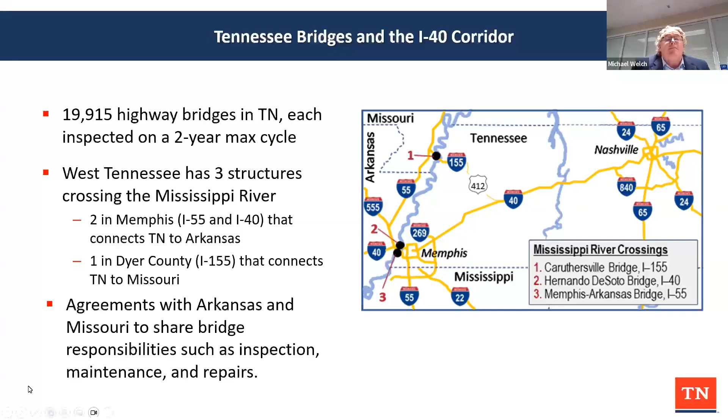The fracture itself was discovered back in May of '21. You can see it gives some scale, since there's people down walking around it making assessments, but you can see the scale of what we're talking about. It was a box beam that fractured, and I think only one side was completely intact. Major concern was the inspector was out actually inspecting the truss section of the bridge, and just happened to see the fracture, and called 911 and then called me directly. His name is Fred, and I told him the other day, anytime my phone rings and the name Fred pops up, I'm answering it. I don't care what's going on, because you definitely got my attention that day, Fred.

So we did put in measures to close the bridge immediately to traffic, and communication with locals, with Arkansas. It was a governor-to-governor, commissioner-to-commissioner kind of conversation, and then lots of planning. Lots of playbooks were pulled off the shelf to see, step by step, what would help us, and then just trying to be as transparent as we could. The one thing we wanted to do was evaluate what kind of condition the bridge was in from a global stability standpoint, and then try to get some things in place to make repairs.

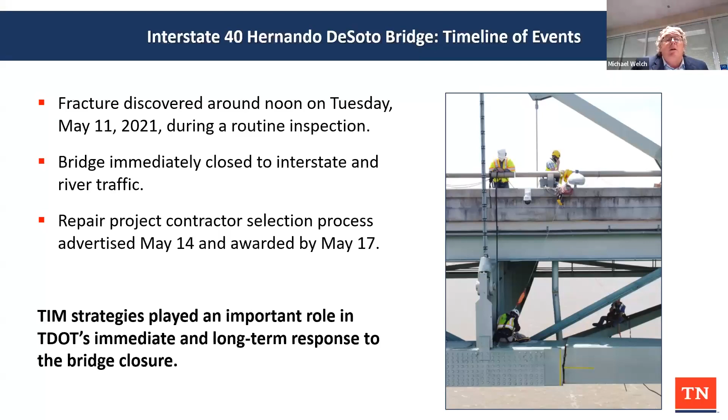We work with so many emergency management services and different ones. One big thing we did with TDOT, we have help trucks - I think they have Heroes in Atlanta trucks that support traffic control and support motorists. Everybody had to cross that bridge, you've seen the drawing there - we've got two major crossings in Memphis across the river. So naturally that other bridge crossing was going to have ramped up traffic. We posted help trucks at the foot of that bridge 24/7 throughout the duration of this closure, which was an extended period of time.

We talk about traffic a lot, but this also affected river traffic. We were continually communicating with the Coast Guard, evaluating the bridge, and considering wind forces and other factors. Barges were stacked up on the riverbanks, with a lot of fuel and freight stored on the river, putting pressure on the Coast Guard. We did everything we could to get the bridge stable and get river traffic open back up.

This bridge diverts 60,000 cars a day, a humongous undertaking. Initially there were some 3-hour delays on our detour. We viewed this as a national impact, working closely with FHWA and several partners, including many freight organizations, to establish national-type detours instead of just routing through the Mid-South.

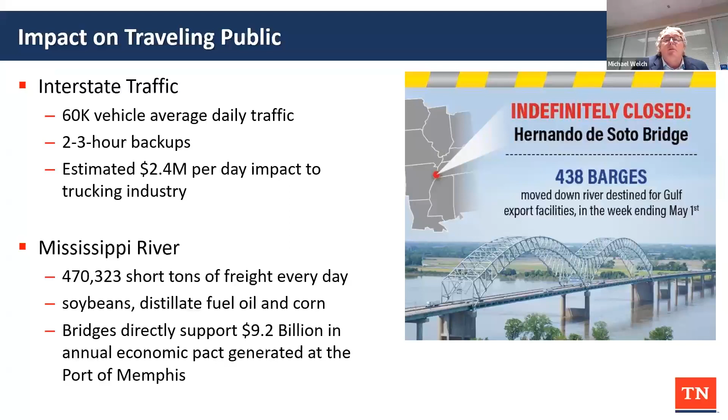One of the first things we did—we're very well established here in the city of Memphis with ITS, DMS boards, and cameras. We're fairly modernized and keep contracts going continuously to update and maintain our system, so we definitely utilized that.

We have systems that run into Arkansas as well, so we have TDOT boards and cameras there, which we used to their maximum capacity to help spread information on a more localized level. There were so many great partnering agencies: the city of Memphis, the chamber, local business owners, trucking industries, Arkansas, Mississippi, FHWA, and emergency management services—so many good organizations.

We took the lead in setting up communication and gathering everyone together, and everybody came to the table wanting to know how they could help. There was no blame, nobody trying to outdo anybody else. They all knew we had to get our oars in the water at the same time and pull in the same direction. I was very proud of that.

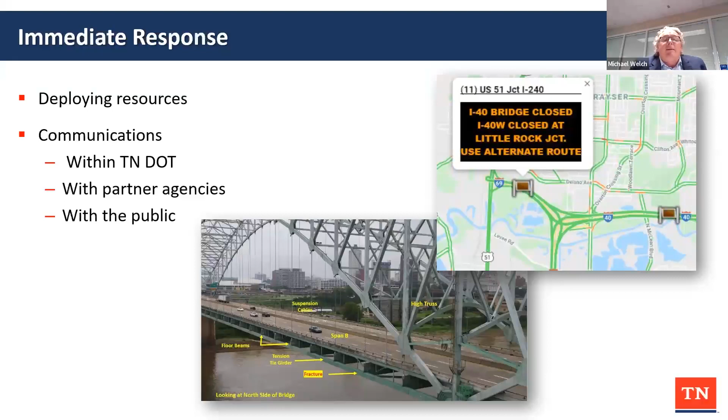This is a look at our detour. Memphis has a southern loop, 240, and the northern part of the loop is 40. We tried to do several things to keep traffic flowing as quickly as possible.

You can see traffic having to make a turn like that, with trucks on an inclined cloverleaf ramp—that's really what gave us our 3-hour delays. So we made several changes to help improve that by the time we're complete, and we'll look at that in future slides.

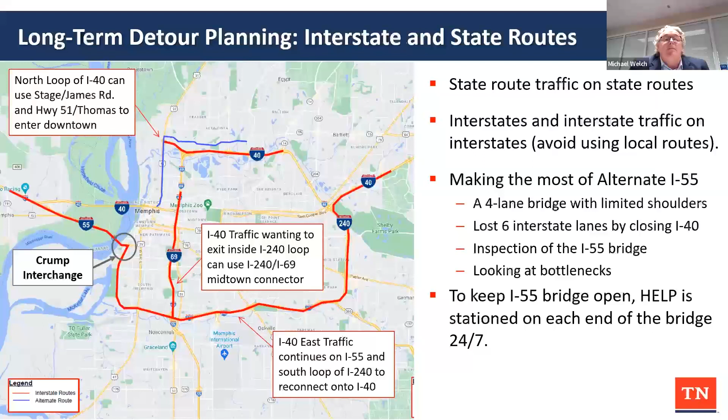So as I described, northbound, the detour itself is Interstate I-55, having 2 lanes of traffic going northbound into Arkansas using that cloverleaf style ramp, and then 1 southbound lane on a pretty sharp ramp itself. So not an ideal situation for an interstate detour, not an ideal situation for a functioning interstate.

But we did make several modifications. Like I said, TDOT took the lead in pulling every partner together, and several were invited and always welcome to attend a daily meeting where we reviewed traffic data. We reviewed a lot of stuff with the city of Memphis. The impact of the local streets around the area was also impacted. We did end up closing a lot of ramps off I-55 just to help eliminate some points that could cause conflict. And then our forces went in.

I was proud of them. They come in on one Sunday morning and widened that 1 lane southbound ramp to 2 lanes. So that helped a whole lot.

And then some of the things we actually were pretty innovative. We had a lot of sharp people attend our meeting, a lot of thinking outside the box by FHWA and several of our traffic engineers that come up with a lot of things like setting up, working with Waze or Google to set up some kind of virtual closures, and that way trucks weren't led down certain roads and things like that. And that was a continually kind of monitoring situation.

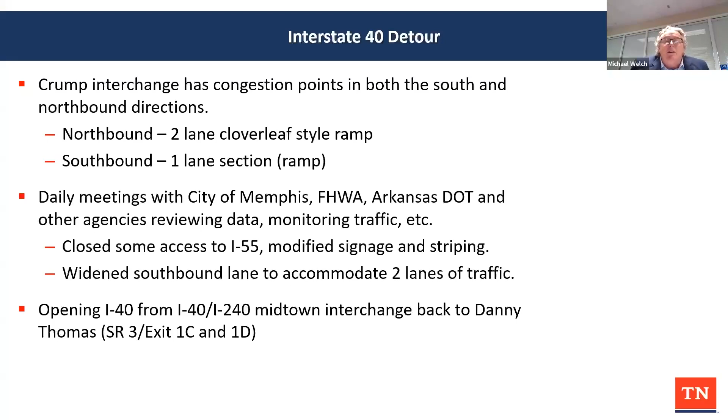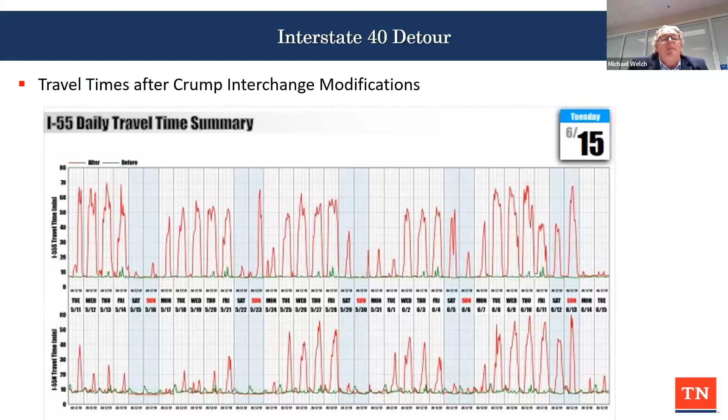And then we kind of get into these, and we shared this weekly on our web, and we had a newsletter go out to media and different partners like the chambers in both Arkansas and Tennessee to kind of make sure everybody was aware of what was going on, and tried to really ramp up our outreach here. We worked really closely with Arkansas to help them make some improvements on their end and our end, just to make continual flow all the way through both states here at the Mississippi River.

So you can see the red here, and that's not good. That's not a good sign. But as we progress through, there's a couple of slides here. If you'll forward, please.

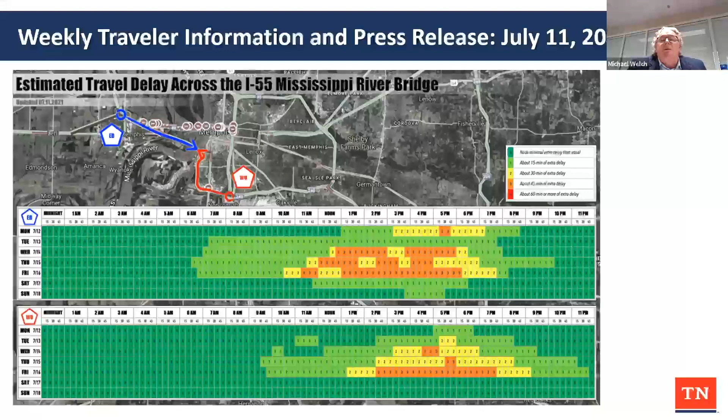Next slide, please. So you can see it fluctuates up and down a whole lot, just depending on the time of the day and kind of what's going on. We did lots of traffic studies and pulled data from several different areas. Next slide, please.

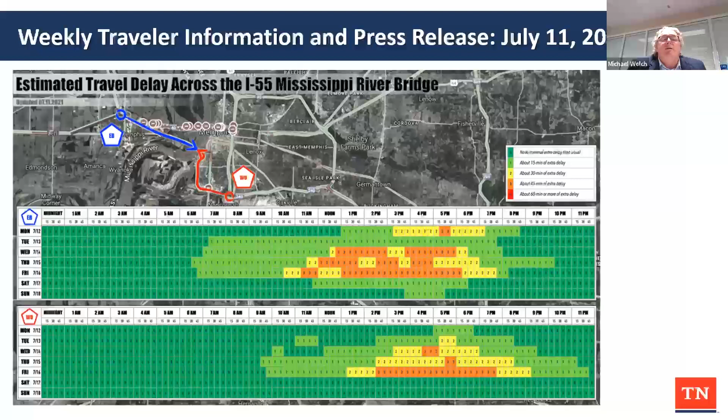And I think we're at the end of July here, and I wouldn't say we got things perfected, but we knew it become predictable after a while, and we had tweaked and made smaller changes. You could see incremental, smaller improvements in the travel times there. Next slide, please.

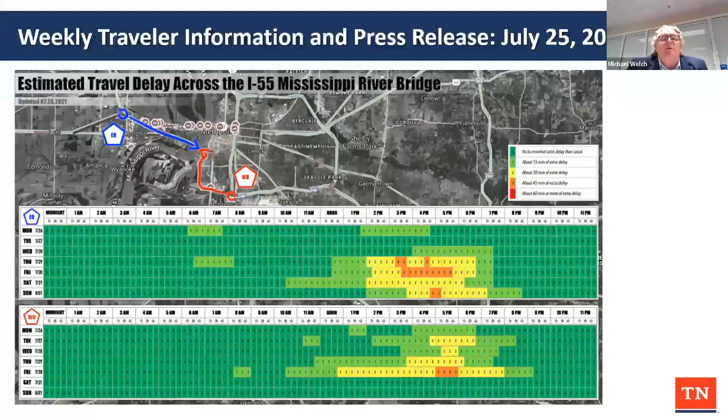So the impact to the local city streets was great as well. Especially we've put all of I-40 traffic on I-55, and they've got a bottleneck at a cloverleaf ramp. So a lot of times it will spread like wildfire out away from those 60-minute travel times and the queuing, as people try to find some different way to go somewhere.

We worked really closely with the city of Memphis and their traffic division to close some things down, adjust signal timings, and put up message boards around town. We're still working through major events, NBA games, and Memphis has a lot going on at certain times, so we have to be aware of that. We ended up developing a calendar with major events on it and keeping that as a reference guide, which was a good pickup.

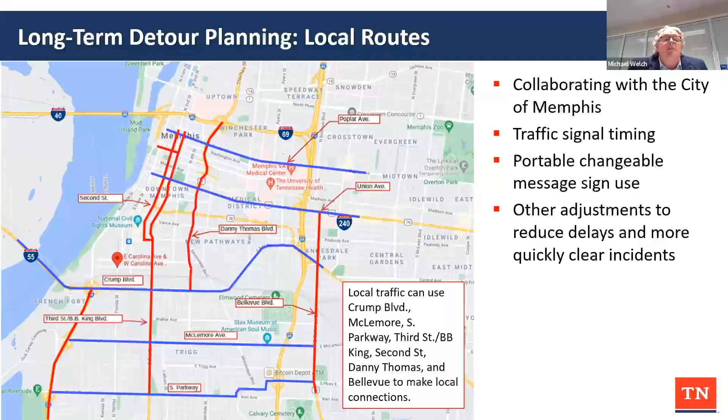The outreach: our public relations division worked overtime continuously to try to keep everybody aware of what was going on. We shared the traffic data and the progress of the repair process itself with business owners. Bad news isn't always encouraging or positive, but just the fact of people knowing things makes a world of difference. Even though it's not the best, at least they know, and there's no surprises.

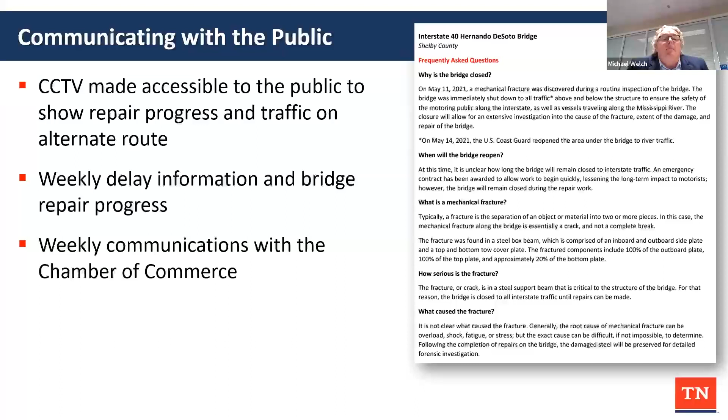A little bit about the repair. The process was broken up into 3 phases. I talked about global stability earlier—making sure it's stable to get on and work on, and putting plates on to beef up the box that was fractured. Phase two was installing large hydraulic jacks and 3-inch rods to take tension off the fractured member, the fractured box, and add the steel. Phase three was adding more support, then loading the bridge up with sensors and testing how it reacted to loading once that was complete.

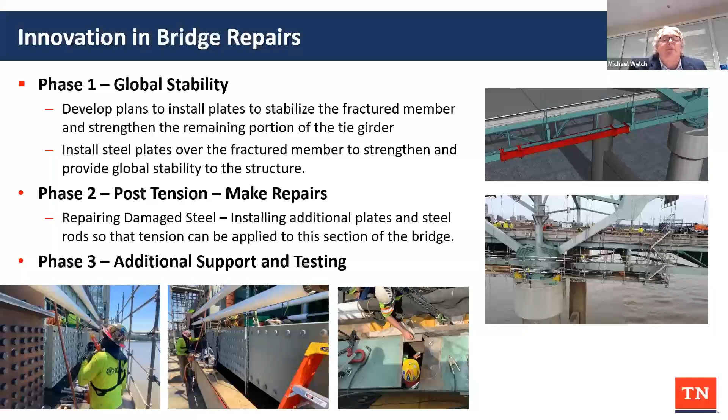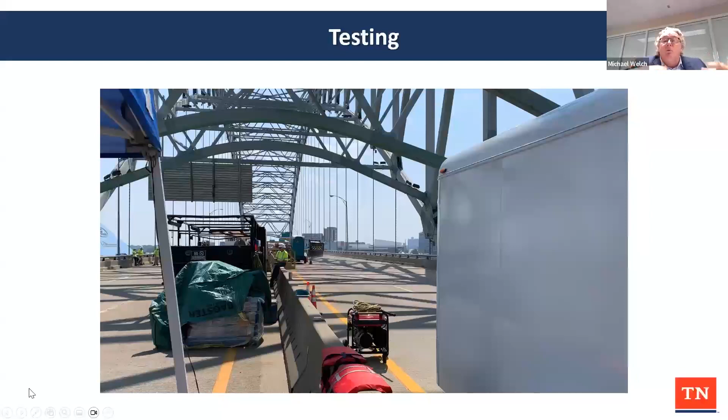Our maintenance guys got to play a hand in it as well, and they were tickled to death to do that. They brought in loaded dump trucks and ran them at different speeds, in echelon, and paired up in different ways, so we could check the bridge at different locations and see how it was responding to loading. That was pretty neat.

Takeaways: definitely collaboration, being as transparent as possible, bringing in every good partner, trying to keep a good attitude all the way through and be positive. We had a lot of good leadership—people stepped up and asked what they could do to help. It was a daily drive to get that done. We did use CMGC, a contracting method we use to repair the bridge. It's not always the cheapest way to go, but given the time factor, we needed to get the bridge open as quick as possible. So that's what we used there.

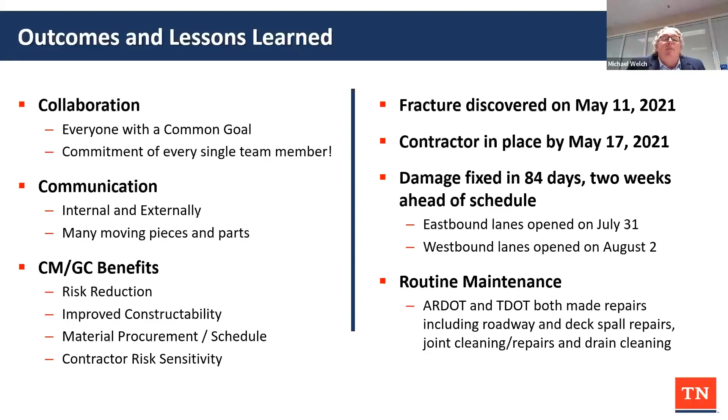The fracture was discovered on May 11th, and the damage was repaired in 84 days, a couple weeks ahead of schedule. There was lots of press—I think the secretary came in and visited with us while it was down. We took advantage of the downtime to make some repairs on I-40, and I think that will wrap it up for me. I'm really grateful for the opportunity to talk about the project. I hope it was of some interest to you guys, and we love to talk about our projects at TDOT, the good ones and the not so good ones—we all got takeaways from it.

Thank you, Michael, I really appreciate it—there's a lot goes on there. Just a little personal memory, a flashback to my childhood: my father was a bridge inspector in Massachusetts, and he actually shut down a bridge in Boston once. His bosses weren't listening to him, and after the third or fourth inspection, he got someone's attention, and they quickly closed it down and caused a big mess in Boston. I don't know the details, I was a kid, but I couldn't help think of my father back then and what must have been involved.